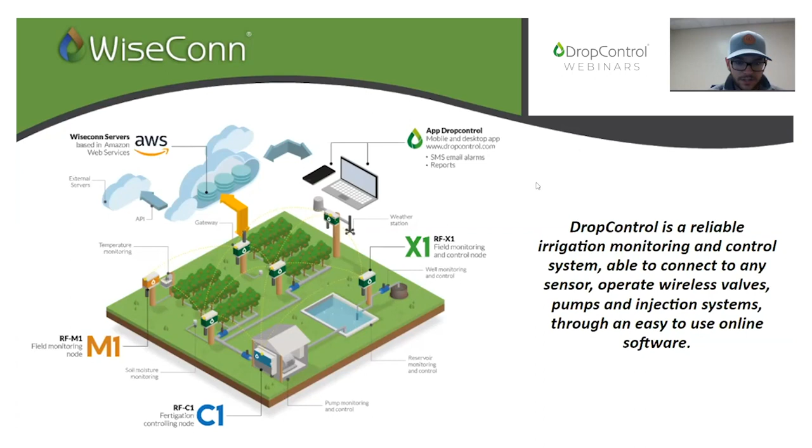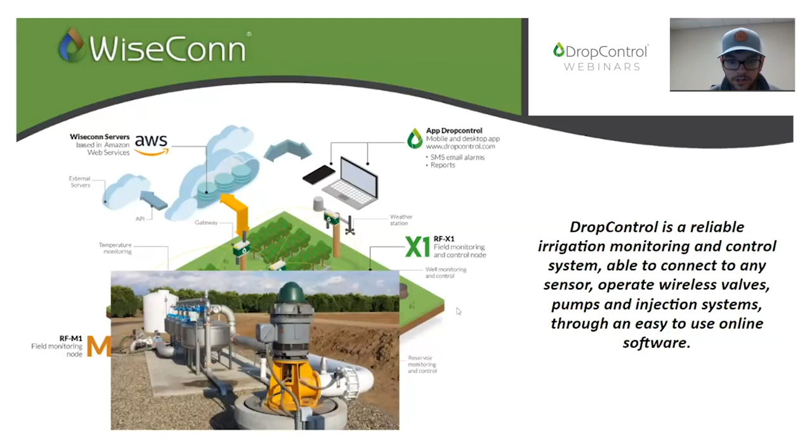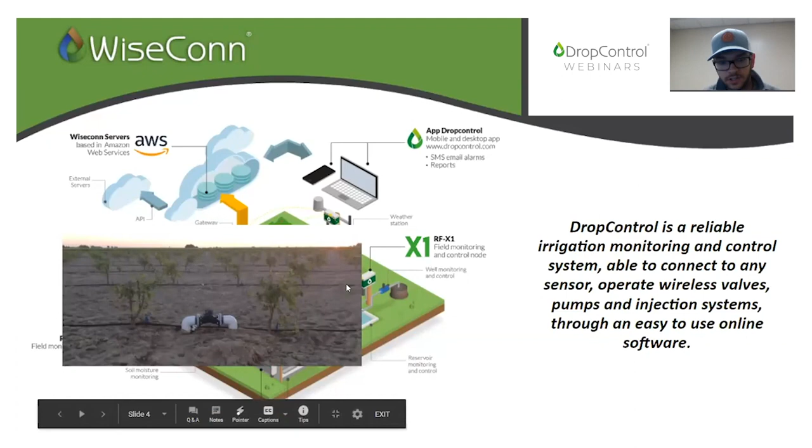So the basics of it is we can do start and stop for the pump. Over here, we can be measuring pressure before and after the filter station. We can do reservoir level control and monitoring, as well as fert tank level monitoring. We can do wireless valves in the field. Some systems may have these already in place, and nowadays they're usually designed thinking that automation might be there in the future. So they'll leave these valves out here. They've got little tri-selectors on them, so you can have them open, closed, or in auto. We can open those.

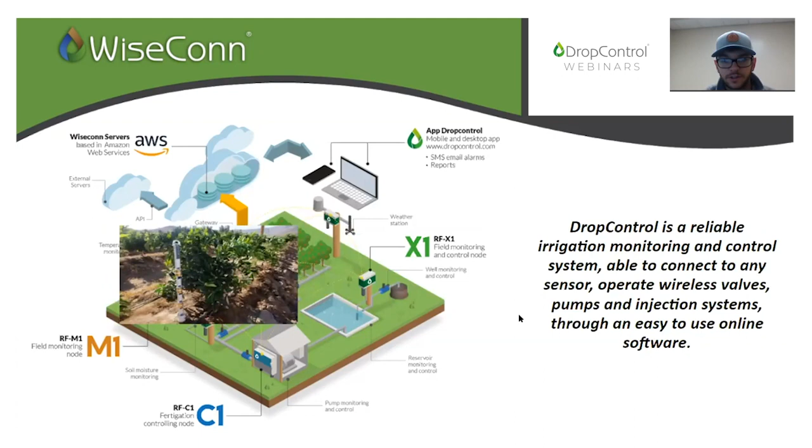We do weather station readings. So we do provide readings for like Davis weather stations. Same thing with soil moisture sensors. We also provide those. And then all of that, like I said, is all done from either your phone, tablet, or the desktop or laptop in the office.

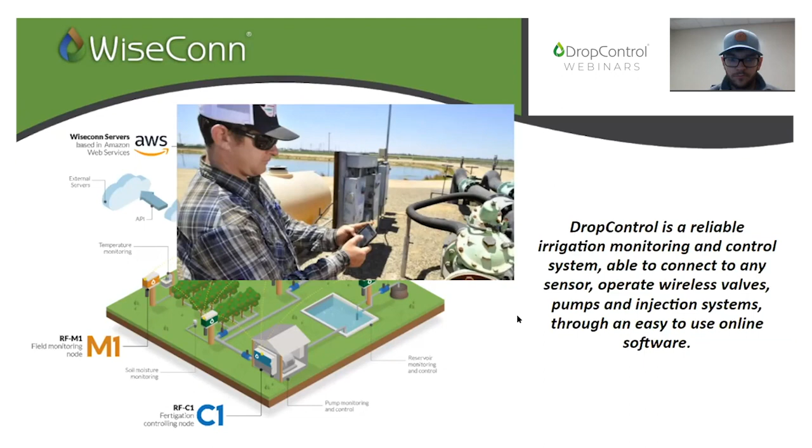So we're composed of our hardware and software. I'll go a little bit in depth about the hardware right now. So our little RTUs that are in the field. The X1 right there in the middle is going to be our flagship node. So monitoring and control, that can be starting and stopping a pump, opening and closing valves, all while reading a weather station, a soil moisture probe, barometer, all that kind of stuff. Switches, it can pretty much do everything.

The M1 is just a monitoring node. The monitoring node is just like any other data logger. It's a competitive price, but also it can read a weather station, pressure switches, soil moisture sensor. It can have a lot of different sensors loaded all onto it. And that one can either be a gateway by itself, if you just need a singular node for one probe, or it can be used as a radio node in the field along with the X1 or C1.

The C1 is going to be the whole fertigation irrigation controller node. So at the pump station, this guy can either be operated via Bluetooth or through your phone, the desktop. And you can schedule 5 different pump systems with different fertigation pumps. You can do 20 plus valves, pressure transducers. It's a lot of what the X1 can do, just jumped up a little bit more. It can do a lot more in terms of control.

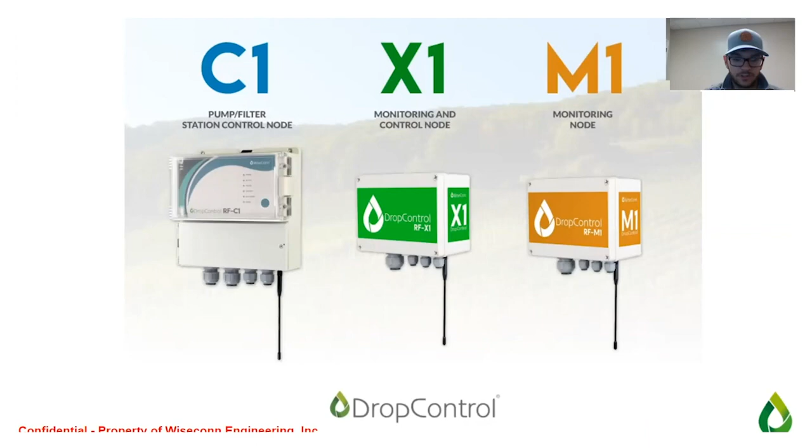They can send that schedule or recommendation over to Drop Control, and then Drop Control can actuate it in the field. So we have the RTUs and the hardware in the field that's going to kick on the pump, run it for the desired duration or time, and it's going to execute that in the field and then give feedback to the cloud. And then other third-party integrators can take that feedback and throw it onto their platform to make more irrigation recommendations. That's a little bit of what we're going to talk about today with Manna specifically.

So right here comes into Amazon Web Services, just like I was explaining on the last graphic, comes to our singular gateway, goes out into the field, sends different commands, and these guys are getting data from either the probes, transducers, and they're coming all the way back to the gateway, sending data to the cloud, and then uploading the data onto your screen.

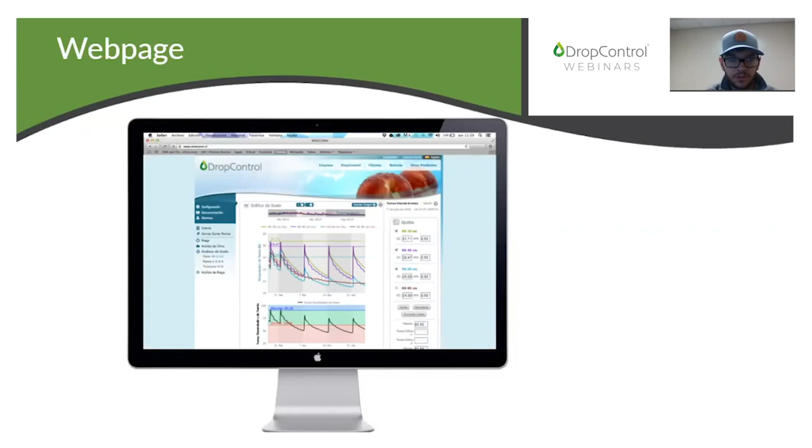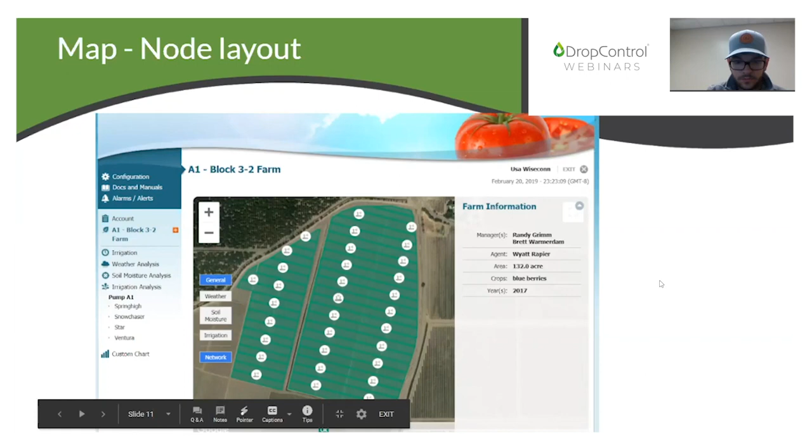Pretty easy way to schedule. So you can do it either by end date and time, volume, and duration. Also add fertilizer injections here. You can add multiple throughout the duration. So if you wanted to do a 24-hour irrigation, you can technically set 3 or 4 different fertilizer injections, whatever you need to do. Also with acid injections, so you can irrigate to a pH set point. You even have little boxes here to clean out the lines beforehand and after the acid injection.

Duration, your hours, date and time is very specific if you need to get it down to the minute. Volume, inches, if you need to put out a 1/4 inch of water, an inch of water, you can definitely do that. We just have to make sure that your flow meter and the acreage on your farm is correct, because that's the calculation it'll use to get your volume.

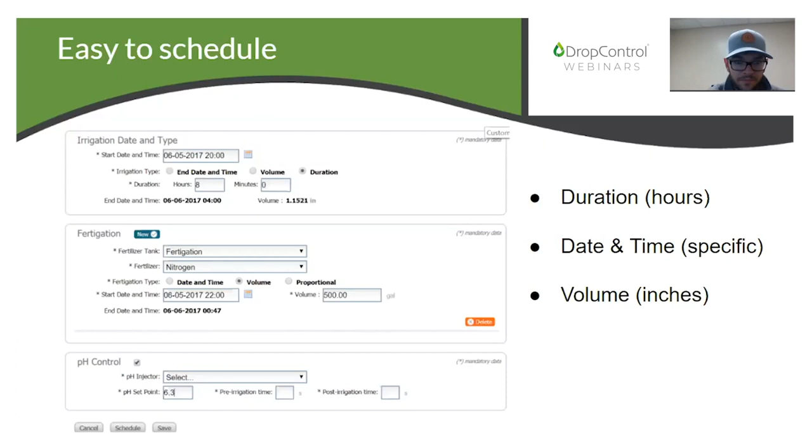A lot of what we're doing now is the templates and programs, trying to get more growers used to that part of it. So creating these templates basically shows you a schedule of what's going to happen throughout the day, or every 2 days or 3 days. But it's giving you a template for what's going to irrigate, what block for that day, and then the program is setting it for a time or a length.

So that one template is going to activate so many days throughout the entire duration of the month. So if you have an irrigation plan for the next 2 weeks, 3 weeks, 1 month, 1 week, couple days, it just really depends on what you're looking for. We can customize those to end and start anytime.

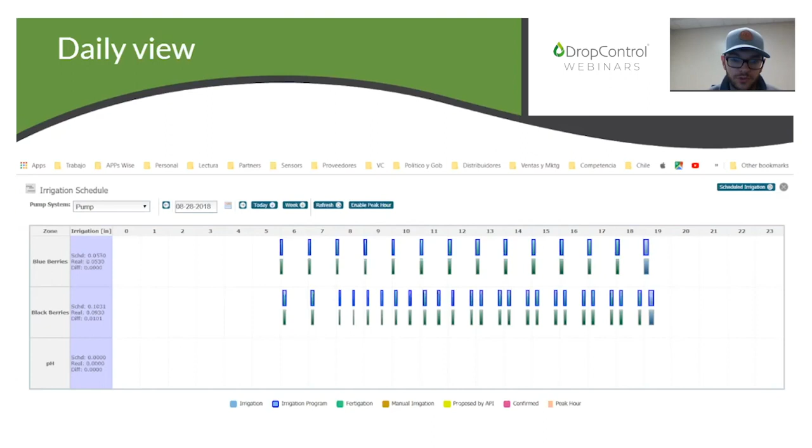This is a daily view, so you can look at your pulse irrigations on a daily scale from 0 to 23. All of it's in military time. Everything on top is what was scheduled, and everything on bottom is what actually happened in the field. So using pressure switches or flow meters or other pressure readings or data, we can kind of truth what actually happened in the field.

We also do the operation feedback. So like I said earlier, the real irrigation is what's on bottom. All the volume is right there. So how many inches you put out versus what was scheduled. And it'll give you a volume difference as well as your irrigation flow. So this is what we actually read in the field.

It was about 1100. And what they thought they were supposed to be operating at was about 1200. This can give you or the grower an idea of if my pump is running efficiently or not, or it's not getting out as much flow as I thought.

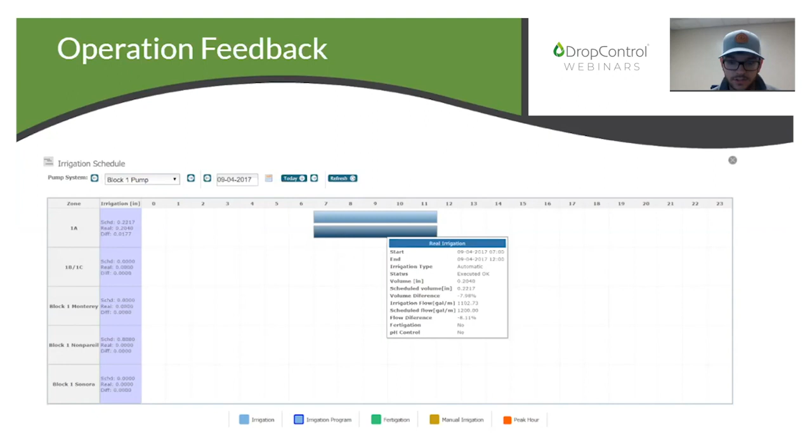We have our flow meter readings. So we have a lot of custom charts where growers can look at their flow and they can look at the entire duration of their irrigations. So you have the weekly volume. So from the 14th to the 21st, that was our volume in acre feet.

Accumulated volume. So this red line just keeps growing. And then we can see the flow meter readings. You can see the flow meter when the pump's on or off. More stuff and sensors to truth the irrigations that are happening and executing via our hardware in the field.

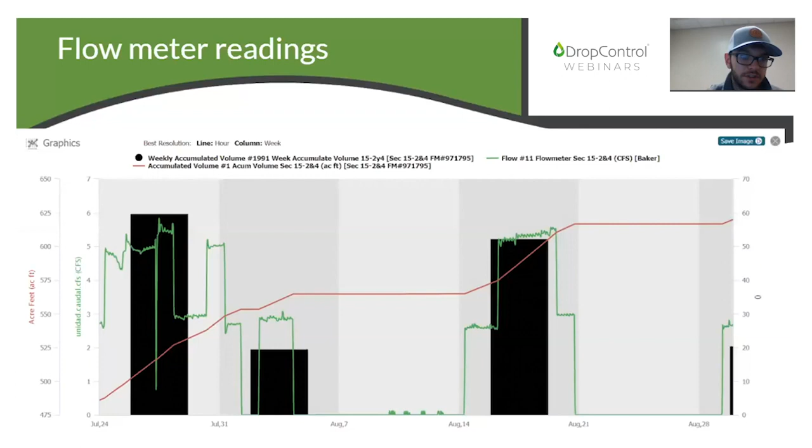We also do reporting. So this is one example of a report. We have a couple different ones. This will show you your total events for certain durations. So we're looking at from the 1st of August to October. We can see we had 19 irrigations, 7.3 acre feet with a total run time. Flushing is something that's coming out later.

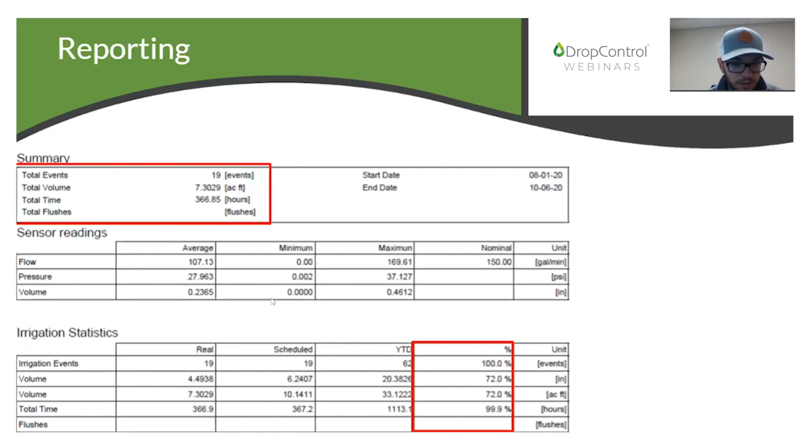Here we can see the statistics. Irrigation events, 100%, 99.9 of them were executed. That difference is within a matter of a few seconds. We have the total volume. We hit it correctly at 72% of the desired acre feet.

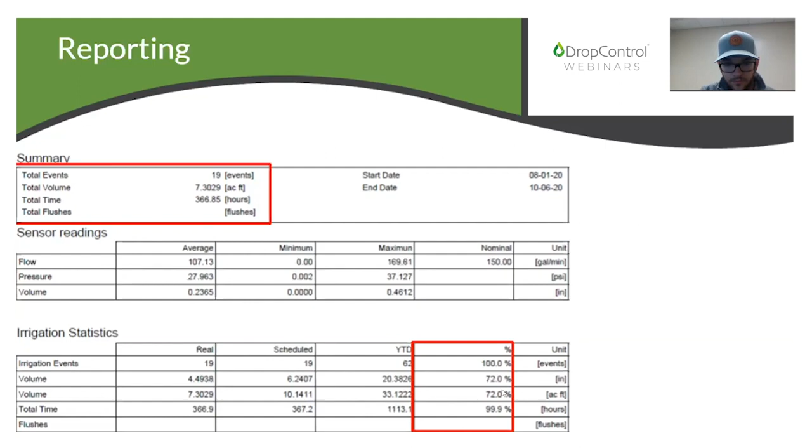We also have a mobile app, available for Android or for iPhone. It'll show you stuff like what's actually happening in the field. So I can see all my historical data. Before you go to the field in the morning, you can just look at what happened the previous day. You can click your calendar and see what's scheduled in the future.

We've talked to a lot of growers. Specifically, in this case, it was a grower of ours out of Madera. He saw his yield increase between 5 and 10% and saved about 30% of his water compared to the traditional methods that he was using. And he did in this season even lose a well. Running irrigations 10 to 12 times a day for certain blocks just to keep the water a little more shallow, but to keep enough water on the field to have a good yield.

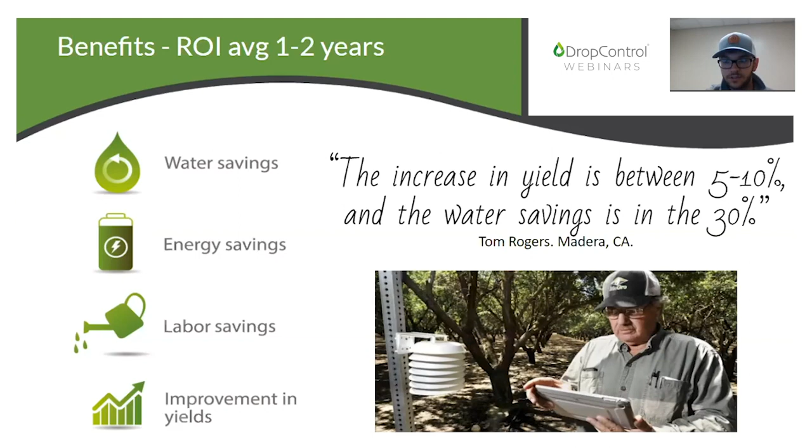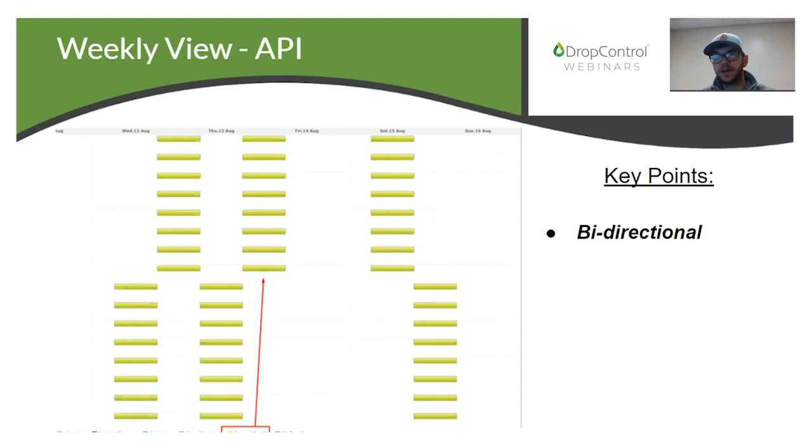The key point here is that the API is bidirectional. So they throw data our way, we throw data their way. If they want to see what actually happened in the field, then they can grab data from us, see how many inches were applied, how many acre feet were applied, and they can use that to show an accumulated amount for their system. This is kind of closing the loop with irrigation execution.

So there's the recommendation, we've got soil probes in the field, or we've got satellite imagery, so we can see the water content in the field. We know what we're supposed to be doing, but how do we make it execute? So that's where we come in with our expertise in the automation side, and we close that loop. And this is also not our first rodeo. We've got 7 different API integrations.

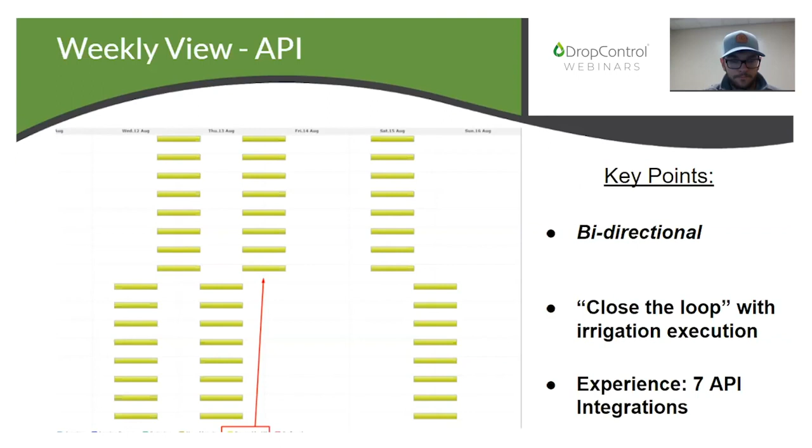This is what I was talking about with the Manna side of stuff. They're going to be looking at the irrigation feedback. So they're going to be pulling data from us, wanting to know the entire applied irrigation compared to evapotranspiration. So here we've just got a little graphic of what our chart is going to look like for our growers. Blue bars signify the irrigations and the yellow ones signify the evapotranspiration.

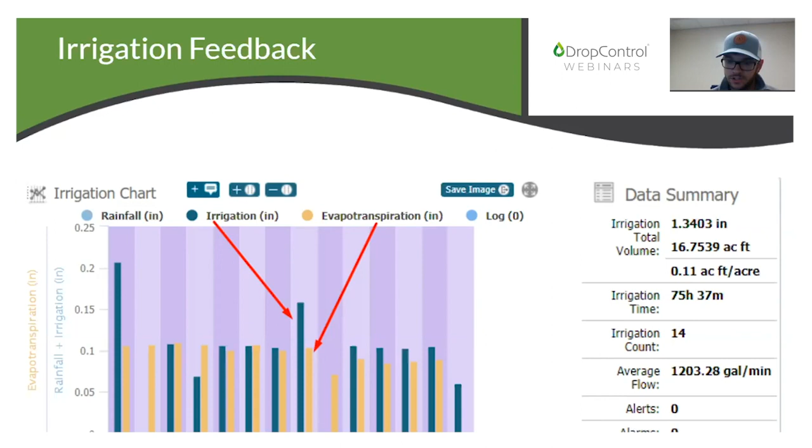See a data summary on the right. I believe that's for a month or 2 weeks of data. So we can see the total applied inches. We can see the total acre feet, irrigation run times, the irrigation count, and that's all from a quick snapshot.

We have our weather feedback. So compare the ETo to temperature to predict your ETo. That's kind of what growers are doing now. Since we're not forecasting the ETo, growers can look here and say if tomorrow's going to be maybe about 70, I can plan on it having this much ETo in inches. So they plan out how long they're going to run their irrigation that way. Where Manna comes in is they take over and they're making an irrigation model for growers to follow.

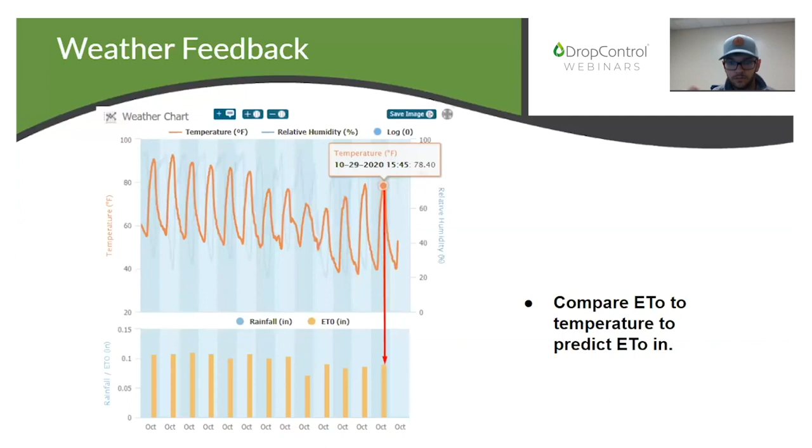ET data here on our platform comes either from a local CIMIS station, which is a California weather service where growers can get free data sent to them with ET, or we get it from a local weather station. So temperature, humidity, solar radiation, wind speed, all of that plays a factor in a calculation for the ET.

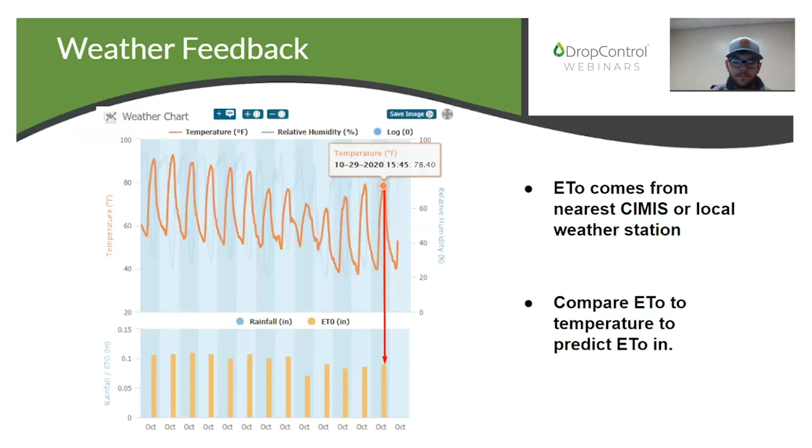So some stuff on the Manna API integration: they take the applied irrigations and they input it into an irrigation model. They use that updated irrigation data for their future irrigation recommendations. They take satellite imagery of the water content measurements.

So thanks, Daryl, and welcome everyone. My name is Hovav. It's a pretty tough Israeli name, I know. I'm based in Israel, born and raised in Israel. I grew up in a kibbutz, if you know what that means. That's a small farming community. So I have my farming background back in the days.

Then I spent most of my mature life in the Israeli high-tech industry, and then I came back to ag happily, to merge the technology and agriculture worlds, and that's what we do in Manna. We use technology in order to drive, improve, optimize irrigation decisions. Manna is a relatively new ag tech company. We're 4 years in the business. Manna is owned by the number 2 drip irrigation provider in the world, Rivulis Irrigation.

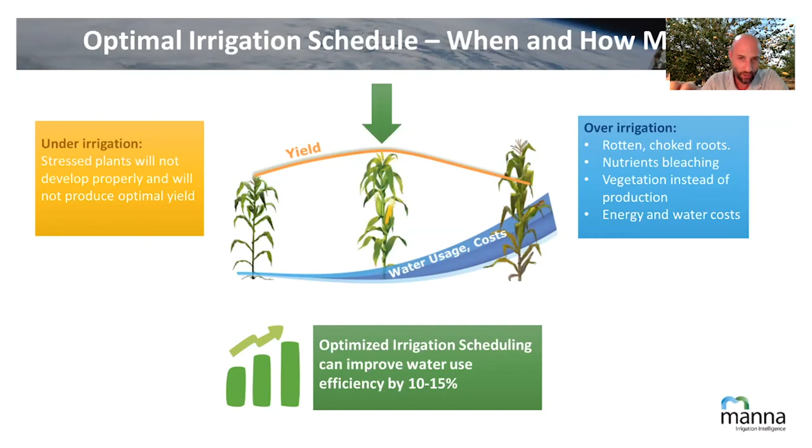So there is this very sneaky optimum point right there in the middle. And that's what we try to do, help growers identify this point by presenting them with very concrete and educated recommendation. You need to irrigate that much on Tuesday. There are a few different techniques already in the market for helping with irrigation scheduling. It's as old a problem as irrigation itself.

So, the first one is based on tradition, intuition, experience. Most growers do have this kind of experience, but we all know it's not as scientific maybe, and there's room for optimization there. There are some protocols or manuals to help growers decide. These are mainly ET-based tables, water tables, crop coefficient tables. They are a good baseline, but they're not really current to my specific field, my specific crop today.

There are many very good technologies for proximate sensing, let's call them, soil sensors, plant sensors on the fruit, on the leaves, in the trunk, in the soil. Many good ways of measuring what's actually going on in the field. Many people find it hard to make those devices or technologies work, and there's a lot of maybe maintenance and cost involved with it. And also in many fields, there could be a great deal of variability. And if you monitor just a single point, it may not represent the whole field.

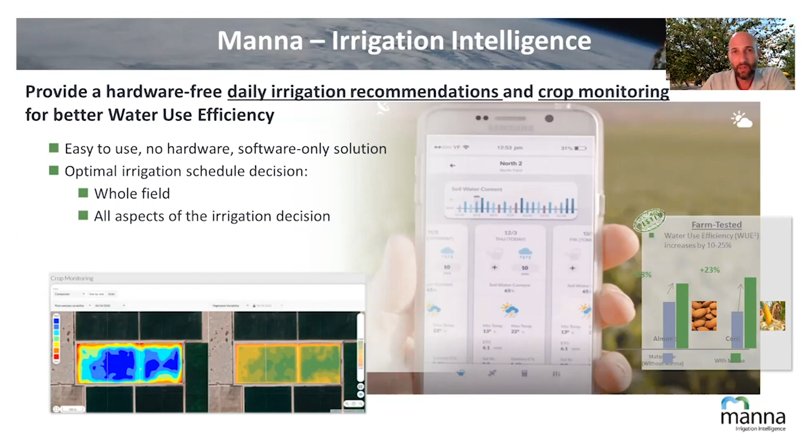Value of using Manna. First of all, you get to or close to the optimal irrigation schedule. You improve your water use efficiency, reduce the cost on water and energy, and get optimal yield. The remote crop monitoring imagery will help you quickly identify issues in your production area and respond to them in a timely manner, so you save potential yield loss. And we have many stories of problems identified like that, and then once you make the corrective action, you save yourself a lot of trouble downstream at the end of the season.

And it is relatively cost-effective and simple to operate and use. It's a subscription-based software. There are no other efforts or investments needed other than the subscription.

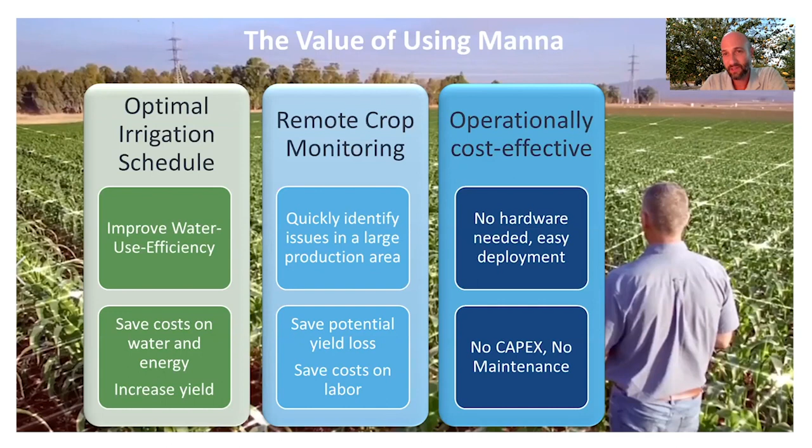This will be maybe the most technical slide here. I'm going to try and explain how it works. We say we can recommend daily irrigation schedules directly or correlated exactly to the crop water uptake, but without sensing anything. So I'll try to explain how this magic works.

So the first step, and this is maybe the most unique thing about the Manna technology, the innovation itself, is using satellite imagery and weather service or weather data in order to measure the crop water usage. That's the crop evapotranspiration. But the actual crop water usage of every day, of every pixel, the entire field, and every day.

The way we do that is those satellite images are being analyzed by our models to get the actual crop coefficient. And if you have your very personal and correct crop coefficient, not something from a protocol or from the books, and you have good reference ET in the field level, then you get really to the crop water uptake or crop water usage. So that's going to represent how much water the field is going to use or lose back to the atmosphere. That's the first step. Now we know how much water goes out of the field.

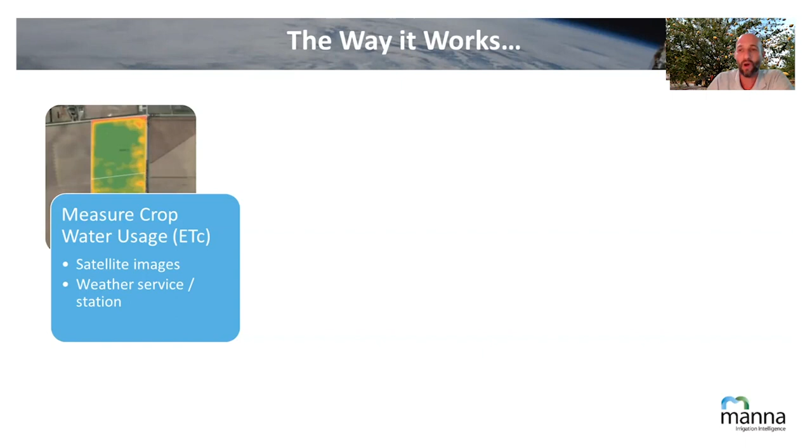That feeds into this soil water content model. The plus, or what's going in, are the irrigations and rain, and what's going out is this crop water usage. Sure, there's some percolation, maybe runoff, it's been included also in the model, but the main flows of water are irrigations and rain in, crop evapotranspiration out.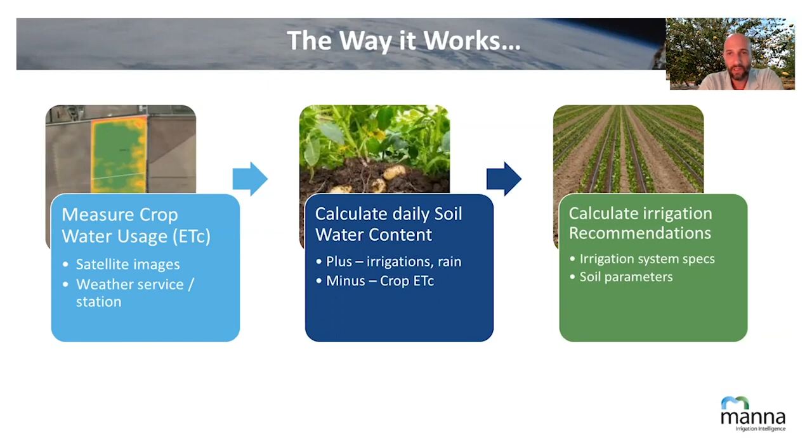Once this model is kept current every day, now in order to make that a very pragmatic and actionable recommendation, there's another set of models or parameters that are being accounted for. For example, the irrigation system specifications, all of the soil parameters and salinity and quality of water, and many more, in order to really provide at the end of it a very simple recommendation, a day and amount.

Now, this is where it gets interesting, or where it's connected to the WiseConn platform. In order to get the actual irrigations as applied, or the operation feedback as it's called in the WiseConn platform, we've connected to WiseConn, so this soil water content is kept updated with not what was recommended or scheduled, but what was really applied in the field.

And that's why it's important for us to get these correct numbers, and also to make it easier on you or users, so you don't need to update it manually or anything. So it's programmatically or automatically being fed into this model.

And sure, as Daryl mentioned, there will be a closed loop where the recommendations will be shown as recommended by API in WiseConn. So you will have the Manna recommendation displayed there, and you can execute or fine-tune and change and schedule it as you see fit, but at least you have the decisions, execution, feedback, and then the recommendations and the execution are a closed loop. This part of the API is not yet available, the execution, but this part is, and we're still working on that. It will be completed shortly.

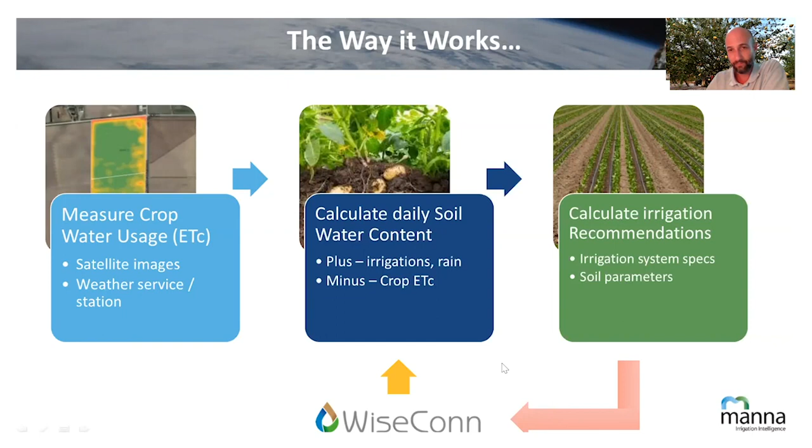Okay, a little bit of this first box of how we measure crop water usage from space or from satellite imagery. I'm sure some of or most of you know the term NDVI. NDVI stands for Normalized Difference Vegetation Index. That's an index very well known and popular in the business since the 1970s. And it measures very, very accurately the density of vegetation.

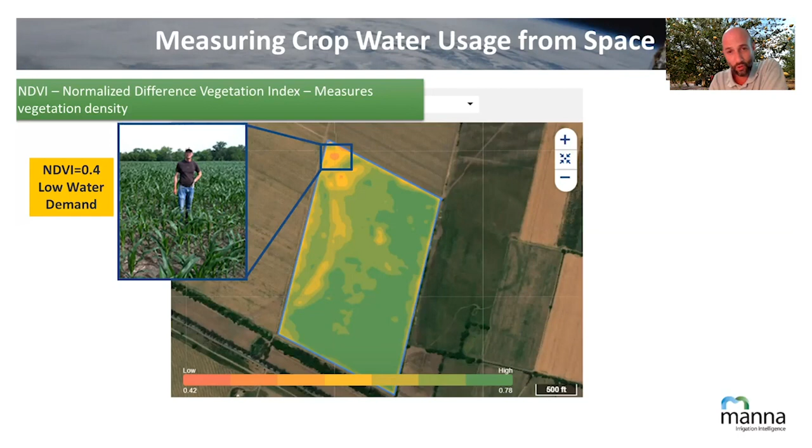So for example, in this image, the red and yellow areas show less vegetative areas, like corn in this example. Light green, a bit more dense vegetation or corn. And the dark green will be very vigorous and dense vegetation. More vegetation represents a higher crop coefficient and therefore higher water demand or higher water usage.

It's maybe much more complicated under the hood, but in general terms, that's how the model works. For every pixel, it analyzes the vegetation, water usage, and then it enables us to calculate the exact water usage of the entire block.

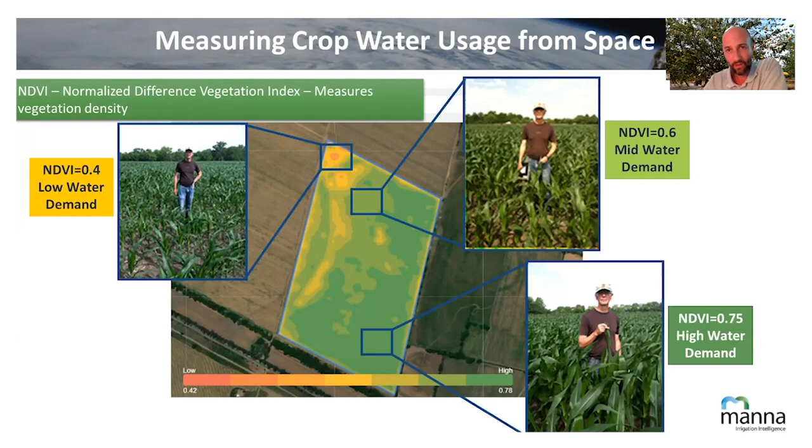Just a little view of some users and results that we've seen in different crops, different places in the world. In most cases, we measure the water use efficiency, yield per amount of water used, and what we want to see is improvement in water use efficiency. And as you can see, in most places, that's what we saw.

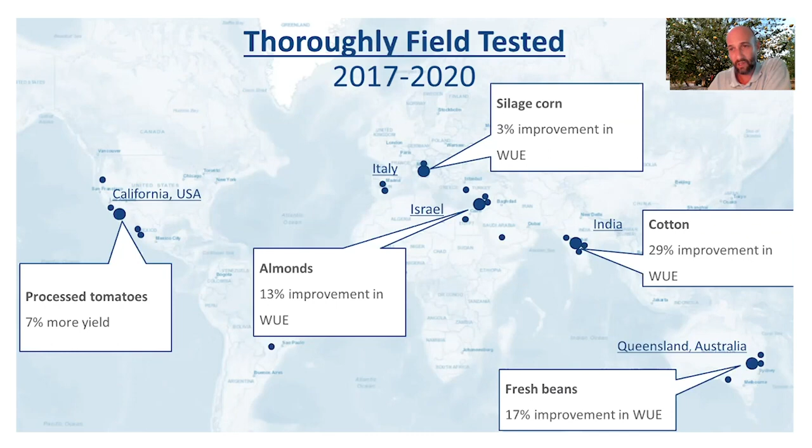And as I mentioned, Rivulis is Manna's parent company. Just wanted to share with you, our parent company's a global leader in drip irrigation technology. It's the second largest company in the world with over 50 years of experience in the market, really global presence in 120 countries. So we get good access to the market, but also a lot of information and intelligence from a very experienced and global irrigation company.

And with that, I want to switch over to a quick live product demo. So let's do that. Daryl, if you're still there, let me know if anything goes wrong on screen or audio. All righty, will do.

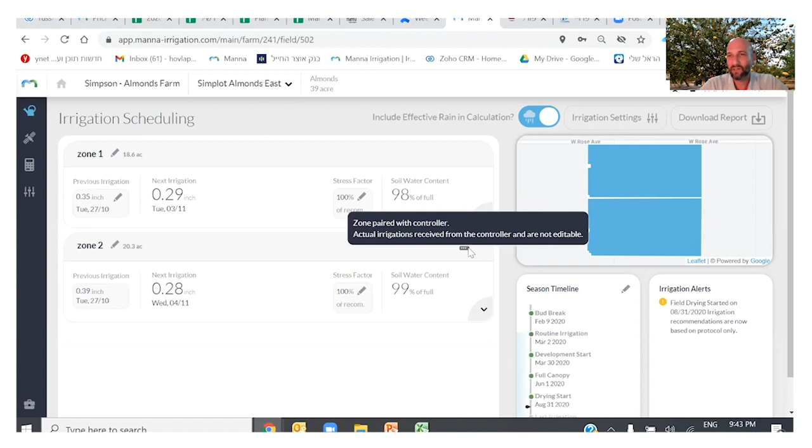Now, this is kind of the manual view. If you can see, there's a little icon here for a controller or a unit. This means that this zone is integrated or paired with a WiseConn implementation or a WiseConn unit in the field. It's not real, it's test data, but functionality is the same.

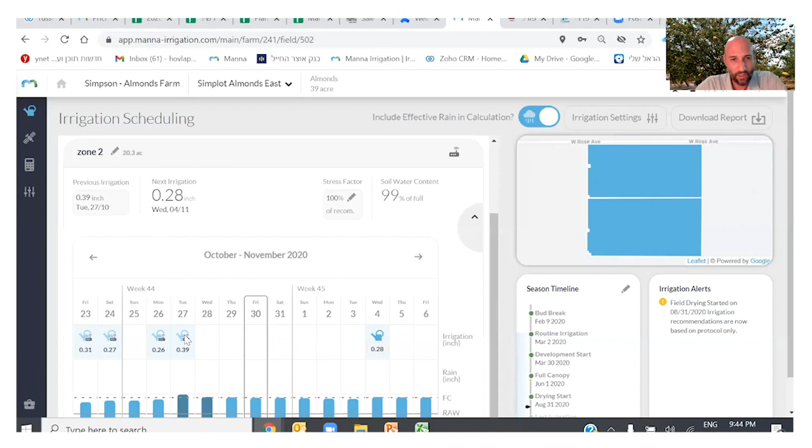So if we look at zone 2, you will see the reading of the actual irrigations coming from the drop control or the WiseConn platform. So these are actual irrigations as reported by WiseConn, entered into the Manna model. So as you can see, it influences the calculation of the next event and the amount needed. And that's why it's important for us and for the users actually to get the actual data entered here.

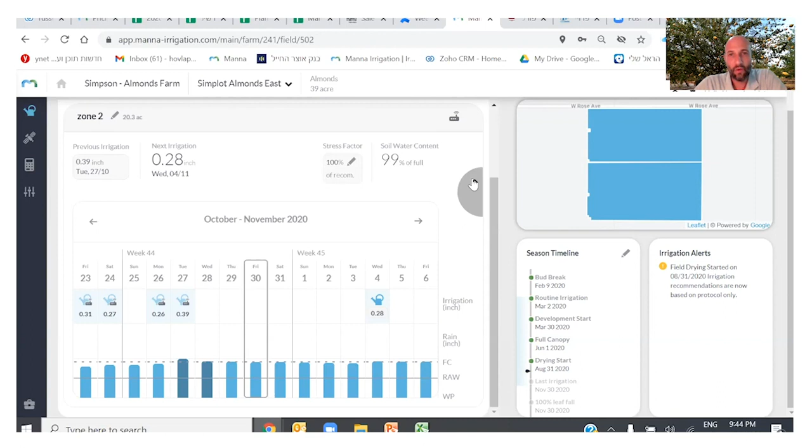Now, there's much more for the irrigation scheduling part. I think I'm going to stop here. There's some other settings and fine tuning and stress and rain and stuff you can do here. But in order to keep it simple, if you work with it operationally with the mobile app, that's what you're going to see. You're going to see next irrigation event, an amount for every field, every zone.

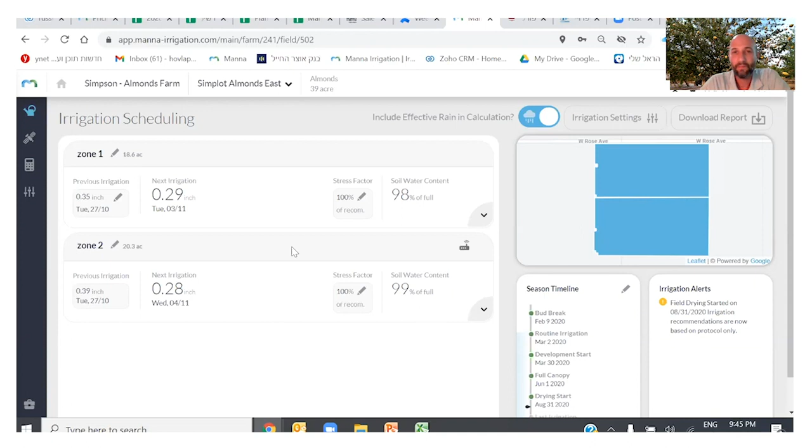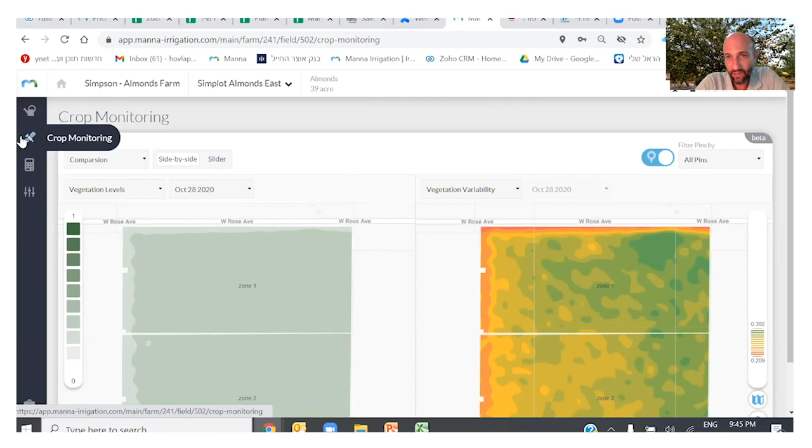Second thing I wanted to share with you is the crop monitoring images that I mentioned earlier. So we get very frequent satellite imagery in order to analyze and calculate the water needs. But we might as well show them to growers because there's a lot of information in them that can help growers. So remote sensing for ag, again, is not something new, but it's been provided here, I think, in a very accessible way.

What you see here are vegetation maps in two different scales. Let's look at this one on the right. This is a vegetation variability, pretty similar to what we've seen in the slide. Red and yellow, less vegetation, green, more dense vegetation or canopy or crop cover. And so you can see the variability in the field.

Let's go back in time, and while we do that, check the frequency. So a common question is how many images I get every day, every week, etc. So you can see here it's about every 3 to 5 days, a new image. Sure, some of them will be cloudy or partly cloudy, but we work with 3 different constellations of satellites, so altogether they provide pretty good coverage.

And you can go back 3 years. So the minute you sign up, you get an archive of 3 years worth of images of your field. That's pretty useful, I would say. Let's go back to summer. So this is a bit more vegetation.

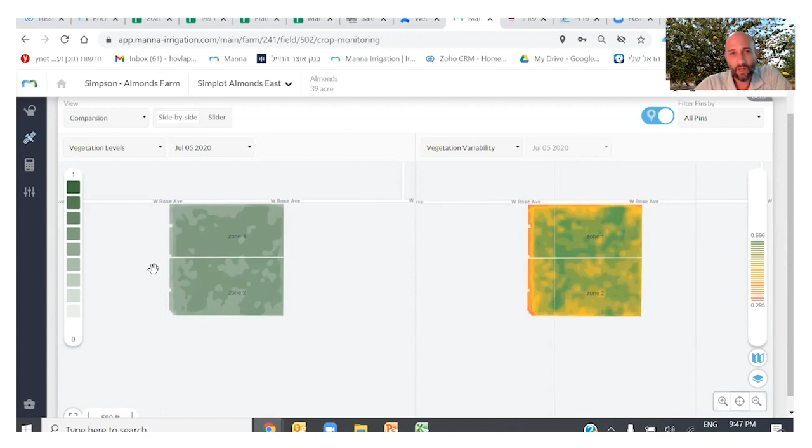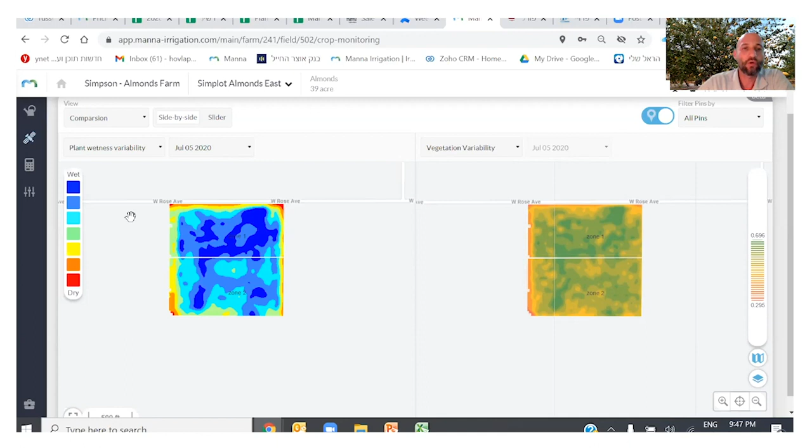And the other thing I wanted to show you is this index. This is what we call plant wetness variability. It shows different information. That's more of the plant water content, or how much water there is in the trees. In this case, these are almonds, not the soil, but in the trees. So dark blue will be trees with more water in them. Light blue, yellow, green, drier trees. It doesn't mean that they're stressed or dead, but they have less water.

And there's a lot of things you can learn from these maps. Irrigation problems to begin with. Sometimes soil type, salinity, rocky patches, anything that interferes with the crop water uptake will show here. Even if vegetation looks fine, you will see interesting phenomena here. So you get these images evaluated every few days, and that helps you keep your irrigation performance in good conditions.

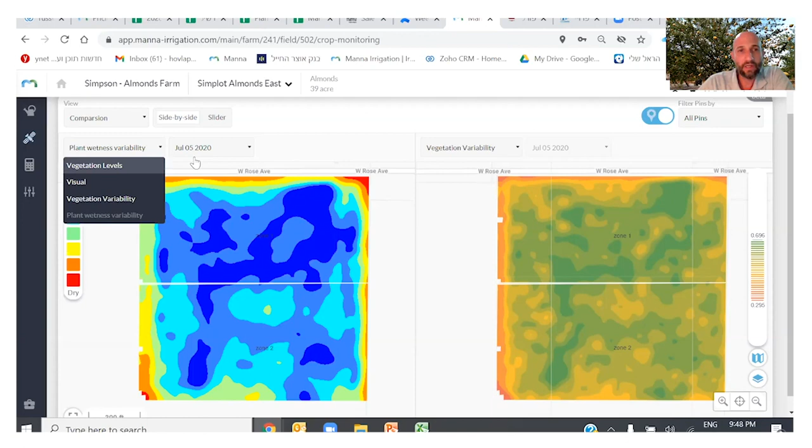The other thing, the last thing I want to show here is the high resolution service. So these images that you see here are based on either Sentinel or Landsat. These are two very popular satellites with 10 meters or 30 feet per pixel. And we also have the third satellite, which is Spot by Airbus, that shows 1.5 meter or 4.5 feet per pixel. And let's look at something from last summer, and you will see the difference.

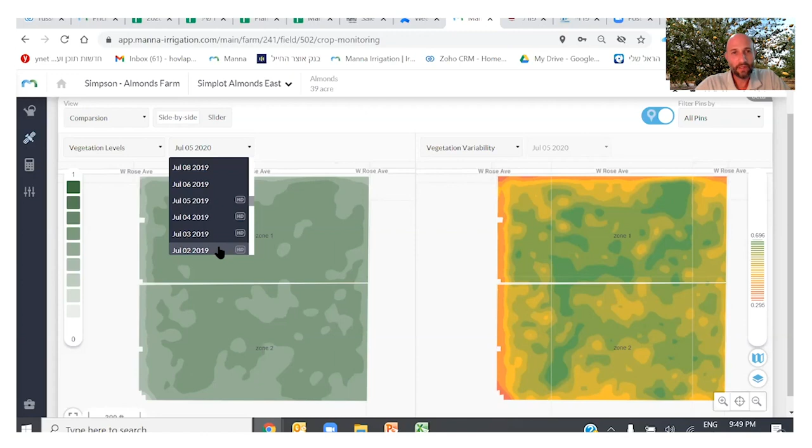So this shows a much better resolution, much more details. You get these images at least twice per month, but as you can see in the summer in California, you get much more than that, like almost every day an HD image. So that's good coverage. And just to show you the visual side of it, you can really see to the tree level. There's some missing trees here. Again, very useful for crop problem monitoring, crop developmental issues, etc.

Very last thing, just to give you a sense of the complexity of the setup. It's not complicated. In fact, you can register yourself online to create your own account. The things you will need to put in, first of all, are the field geometry, at least the outside boundaries. Internal partition to zones is recommended, but not mandatory. And then field info, at least the name, the crop.

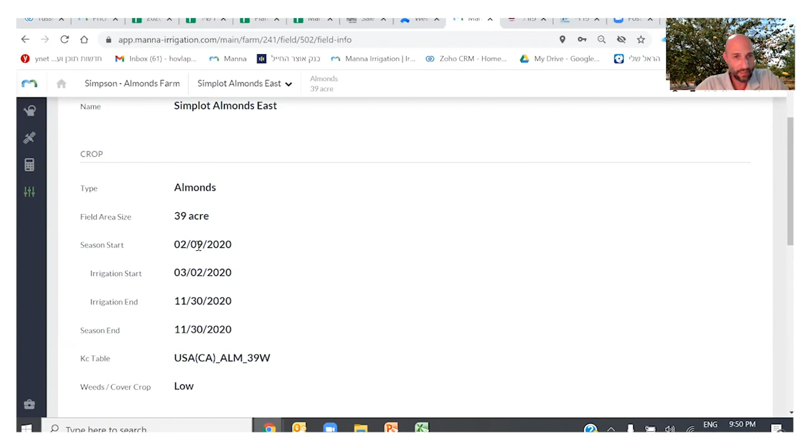Season start, just give us the start of the season. If it's almonds, it's going to be bud break. Field crops will be planting date, etc. Information about your irrigation system, and a little bit of information about the soil type or texture, taken from the USDA database. So you have a good default, and you can always change it, but that's about it.

So not a lot of work in setup, and then usage, again, is relatively simple and friendly. So all you need to do is open the app and you get your irrigation recommendations.

I would say tomatoes, some peppers, almonds, avocados, grapes, table grapes, wine grapes, corn, a lot of corn. Do you have any stuff in lemons or avocados by chance? Yeah, avocados for sure. Lemons we do have mainly in Latin America.